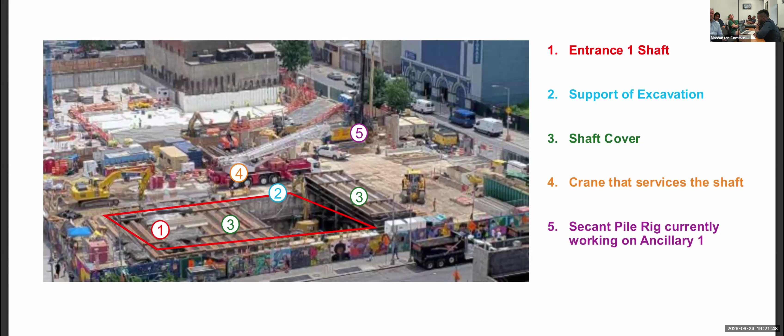On contract one down at the 106th Street station, the work there is currently to relocate the utilities. The two major functions this contract is advancing are the utility relocation, and this is the lessons learned from phase one, because doing the utilities as we sort of got there in phase one created a whole host of complications.

Despite our best practices and coordination with our agency partners, invariably some of the plans we got were outdated - some were 100 years old. They did not accurately reflect the subsurface conditions there, which resulted in a lot of problems and curveballs we had to navigate around, literally and figuratively, extending time and impacting the surrounding community.

So what we did was push all of that utility work up front to get it out of the way. Yes, it's impactful, but it's like ripping the Band-Aid off now so that we're not continually coming back to impact electric one year, water the next, sewer the next. We're doing it all now to get it out of the way so it's done for the foreseeable future, till the end of the project, and we don't have to impact the same community multiple times.

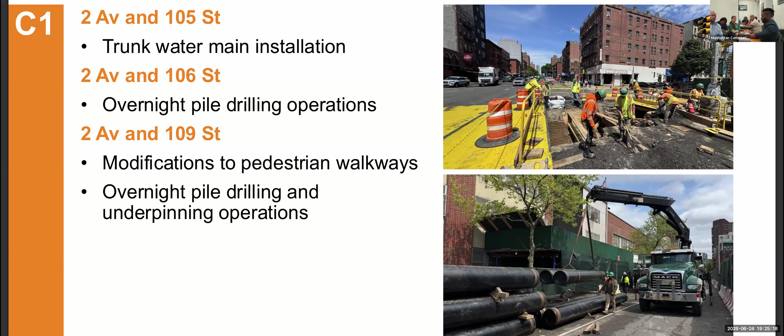There's a modification of pedestrian walkways and overnight drilling and underpinning operations, which is creating that stable environment, but also creating stable buildings to be able to withstand the future work.

Next slide. For contract two, which is a bit north of there, that's for the 116th Street station area. The crux of the work for contract two is the modification, remediation, and retrofitting of the 116th Street tunnels that are presently there now from 110th to 120th. Those were built in the 1970s.

For those of you who might recall a previous iteration of this project, it did run out of money and couldn't finish, and they left us a pretty good starter hole. So what we're going to do is turn those tunnels into the new 116th Street station area, so we aren't going to waste all of that effort and money that went into that.

We're going to turn those running tunnels, because back then they had envisioned a center track that would have been used to pull trains off in the event they needed maintenance or if there was an issue. That center track now will be converted into a future center platform where folks will be able to access either the uptown or downtown bound train. The space for us to implement that is already there.

Along with retrofitting of the 116th Street existing tunnels, they're also going to be doing the tunnel boring operations from 120th Street north to 125th Street, and then west all the way to west of Malcolm X Boulevard.

This is also another lesson learned from phase one, because of the very vibrant commercial corridor that is 125th Street. We had originally envisioned some of that work being done cut and cover, but that's definitely more impactful than doing it with tunnel boring machines.

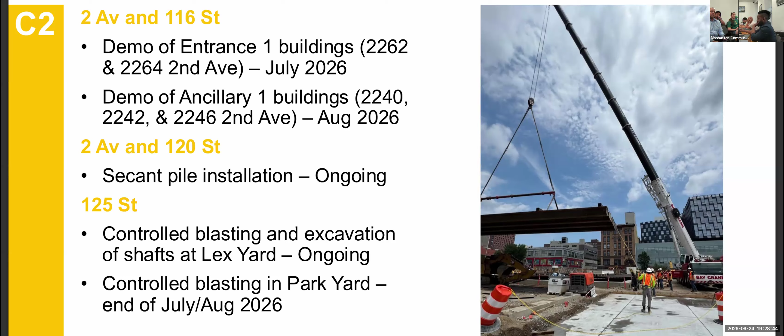Over at contract 3, which is the brand new contract that is going to be mining and creating the tunnels and the station entrances, the structural shell, if you will, they're not going to be putting in any of the actual components or the guts of the station and tunnels. That will be contract 4 after them.

But they have already mobilized on the northeast corner of 106th and 2nd, in the public plaza area that is outside of Franklin Plaza. We acquired a portion of that space outside of Franklin Plaza's buildings, and we have started to mobilize for the contract 3 work, which will eventually excavate for the entrance. It's called entrance 1 for us, at the northeast corner of 106th and 2nd.

They're presently in there doing survey work to confirm. These are design and build contracts, and for those who may not know, the MTA takes the design to about 30%, then puts it out for bid. We lean very heavily on the expertise of these contractors that bid these projects and eventually win them, so that we can lean on their know-how from doing similar projects elsewhere in the country and the world, to do this project better, faster, and cheaper with less impact.

So we bring it to 30%, and then they take our design, confirm our presumptions, and advance that design. That's what they're presently doing at the northeast corner of 106th and 2nd now.

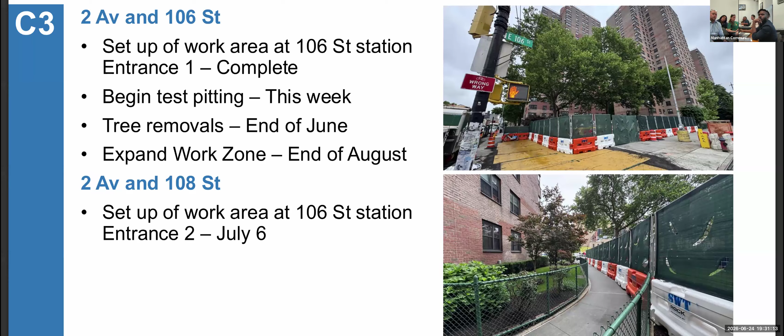So for contract 1, we've been hearing a lot about the business impacts. One thing we have at our disposal is the ability to help with awareness that these businesses are still open, despite the work going on, behind barriers which can often obscure the line of sight to these businesses from the street or the opposite side of the sidewalk, sometimes even the same side of the sidewalk if we have a protected pedestrian walkway outside of the fence line.

So we originally had installed some signage. We had heard from the store owners, from the community board, from our elected partners that signage was not adequate from a size and awareness standpoint. So we went back to the drawing board, and there was a redo of all that signage.

I'd say approximately 90% of that signage is up now throughout the contract 1 and contract 2 areas, because we had to go back and replace what was up of the contract 1 signage, put in new signage, and advance the additional signage. Contract 2 signage rolled out a little more seamlessly, using lessons learned from contract 1, so it was a little quicker and smoother of a process.

So that fence wrap is up. There's also in some areas of contract 1 temporary awnings that have been put up. We've worked with the business owners to design the graphics for those awnings. Because of the machinery needed for the support of excavation and support of their buildings, the machinery is at a height that impacts or would have impacted those awnings. So we temporarily removed those awnings and affixed temporary signage to the building, again to help create awareness.

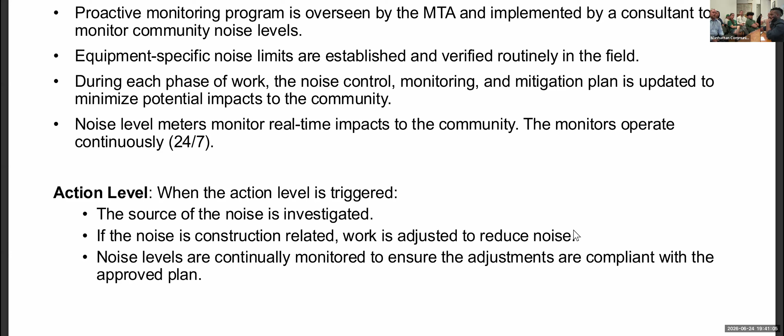We were asked by Uptown Grand Central. We worked with a lot of the stakeholders in this area back in 2022 to do a visioning exercise in and around 125th Street and Park, to understand what the community would like to see from an improvement standpoint, because the mobility hub is there. You have the confluence of Metro North, the subway, and the bus network all there. So there was a report that was done and submitted to the city. A lot of the improvements and findings fell squarely in the court of DOT. So we are in the process of inquiring with the city if we can release that report. More to come on that, whether we can turn that report over, even in draft form, to Uptown Grand, and of course, if you all would like to see a copy of that.

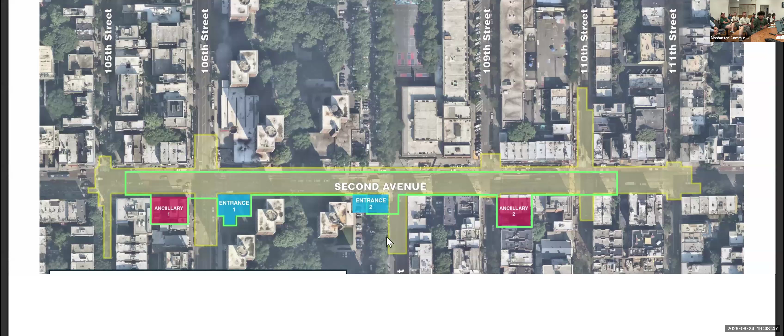Okay, well, now I will ask my question. So I walked by there around school dismissal to see some of the concerns that Dr...

Christie brought this up at the youth and education meeting. You mean 110th or 109th? 109th. I don't think they have anything on 109. We do, right around the corner on both sides. Yeah, they're currently doing building stabilization on the east side, and we walked through it today.

So there are two blind spots on either side when kids are trying to cross the street after school, and they can't really see the cars coming before the cars arrive. So I know, like someone brought up earlier, could the storage be moved to a different area because it's really dangerous to cross? It's a wide road and half that road is cut off.

So a couple things on that. I'm happy to take a look at it. For any of our work zones, we follow DOT guidelines and stipulations. That first 10 feet of the work zone should not have any covering. If there's fence there, it should be open to create a clear line of sight, not only for pedestrians trying to cross there, but for vehicles to see if anybody's going to dart out, because not everybody, vehicles or pedestrians, obeys the traffic signals or the walk lights. So that should be open and visible. Not to say it's foolproof, but if there's a line of sight issue, that's easily correctable and we'll take a look at it.

The other thing is, especially at 109th, there should be pedestrian managers, essentially crossing guards employed by the project to help navigate, especially during school entrance and dismissal. I know during off hours they're not always there, we don't employ them 24/7, but certainly during the high water marks of entrance and dismissal of schools, they should be there to help folks navigate safely across.

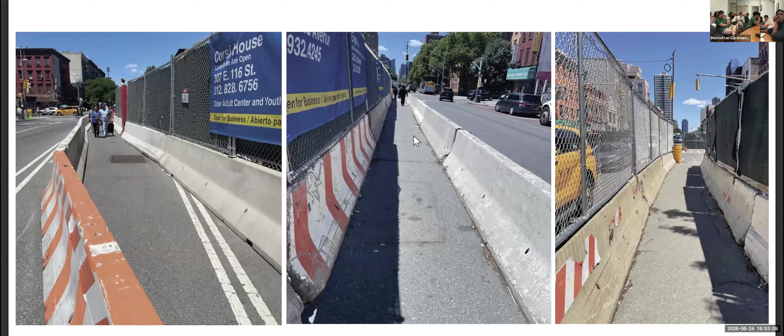Okay, thank you for the presentation, a lot of great information. My question is regarding the blasting time, and I know you said you'll give warnings, but during that time, do you cut off pedestrians from walking during the blasting?

So that was part of what we were monitoring for when we did the test blasting, to understand the impacts. It's been determined that they don't need to stop pedestrians on 125th Street. I'd have to double check whether we're stopping pedestrians on Lexington, right adjacent to the blast. I'll check that for you. But I know we've confirmed there's no impact on 125th, so pedestrians can flow freely there.

Going from east to west? Yeah, I'm just trying to reorient myself, because we go north and south on Second and then east and west where we turn. So they can go east and west. I just need to confirm whether they can go north and south on Lex.

We've also tapped into the city's notification network. So whenever we're going to be doing blasting, they send out a text blast to let everybody subscribed to that network know that they may be entering a blast area. And would you be posting those type of notices on the streets themselves?

Yeah. So the hours of operation for the test blasting right now, or the production blasting, are 7 to 7. We try to stay out of the rush hour periods of transit because of the proximity of the existing Lex line there, and the volume of people coming in and out of the station, so we try to miss the high marks of that.

So again, the production blast for Thursday is scheduled for approximately noon now. There will be notice that goes out again, just letting folks know. Thank you. Oh, thank you so much for allowing me to ask my question.

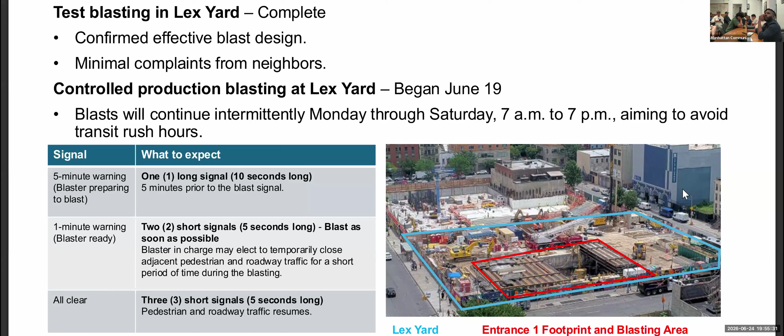And my question has to do with what the honorable councilperson said as it relates to garbage and waste. I'm chair of Health and Human Services, and that's a big issue. She said that in terms of garbage and waste as a result of your folks, but then folks in the community have to go out of their way with their own garbage and things of that nature.

We just had the Department of Health and Mental Hygiene, we just had a Rat Academy training last week, and it was a lost opportunity for folks; so many more of you should have come out for that. So when we talk about waste, we talk about pests and vermin, it's not just that the vermin come up because of the construction, it's because of the waste and garbage and food materials left. So I don't know if you actually gave a good answer to that.

Because it's a big issue in terms of the waste, garbage and sanitation. Are you in collaboration with DSNY? Oh yeah, so I don't think I tackled that. I don't think we provided a response because we weren't necessarily going to address all the questions and comments tonight, we were going to sort of synopsize everything. But I'm happy, as a point of this Q&A period right now, to address it.

So yeah, we work hand in hand with DSNY, and we work hand in hand with the Department of Health and Mental Hygiene. Before we put a shovel in the ground, we walk the entirety of the alignment with them to understand the prolific rat presence already here in East Harlem. One misconception is that the construction created the rats — that's not the case. We may have disturbed their burrow, and now you see them more because they're looking for a new place to live or new food. So there is that component to it for sure.

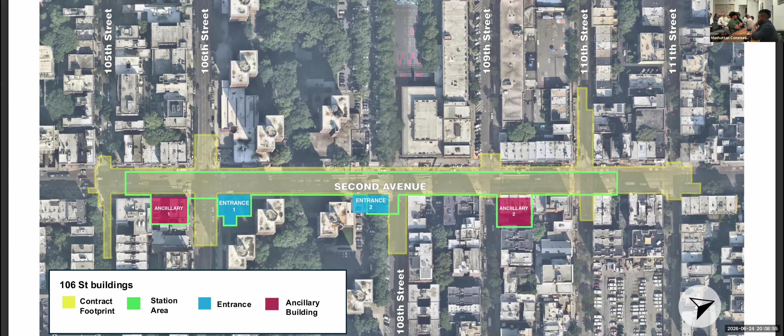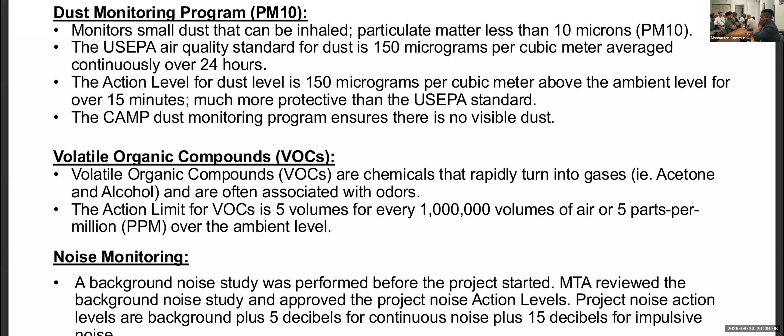With regard to dust monitoring, there is dust monitoring presently going on. There was asbestos monitoring when there was asbestos producing or mitigating activities. So if we were moving any utilities that may have had asbestos insulation around them, that relocation or removal of asbestos material was done in a very strict, confined protocol. That activity is over with for now, until there's another situation. I don't know, Matt, if you know if there's anything coming up. There will be more abatement situations, but there isn't presently, and there have been no elevated readings in that area that I'm aware of.

Again, if there's a situation - we had one, I don't want to put anybody on blast, but there was a resident of Franklin Plaza, Ms. Encarnacion, who had a lot of medical concerns, and she had dust collecting on her windowsill. So our team and DEP went in to test, and there was nothing for our Department of Health and Mental Hygiene - not DEP, apologies, DEP checked the drainage for us. But she was on the other side, above, on the west side. So we're happy to do that.

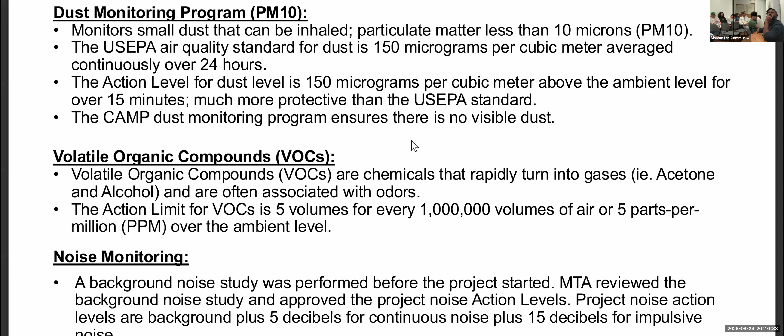Either have the gentleman reach out to us, or, the MTA meets with Franklin Plaza more than they meet with us. So they're definitely going to have their disconnect, and something I brought up to leadership today in the MTA, is there's a disconnect between the board, the chair of the board of Franklin Plaza. It seems like the board isn't getting the information they should be getting.

How you guys address that will be up to you, but you should be aware that there seems to be a significant disconnect. My understanding is Leslie's on that board, I'm on that board, and she's always asking us more questions here. You guys meet every other week, which is significant, while we meet here once a month. So a lot of these questions should be presented to that board, and they should have these answers. You may have to formulate another way, maybe meeting every other week with the entire board, not just the chair, to make sure all the information is being disseminated correctly.

I'll just go through a few things. When Jose and I put this essentially defunct task force back in place, there were a lot of issues, and I've been probably one of the louder people about those issues. But I think we also have to recognize when there are improvements. Jose and I walked through with Matt, Joe, and the team, and I'm not saying there aren't a lot of issues still there, and I think they're aware of them, but there have been improvements made, which means not to stop doing this, but to keep doing this while recognizing the improvements.

I will say that it's helpful when the public comes out, and we're going to do a better job of letting you all know when these meetings are to be heard. Because sometimes when it's just the board saying this, while we are the voice of the public, it may start to sound like we're speaking for nobody. It helps when the public comes out and says it themselves.

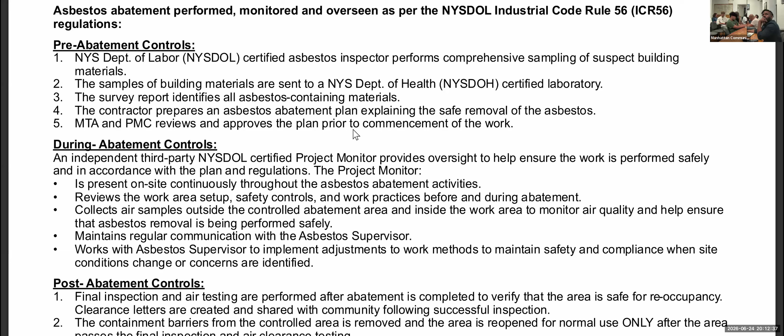And then, just regarding signage, I just had a couple things. Maybe more ADA signage, we talked about that on the walk, and where there are vacant stores, possibly having them put up a for rent sign. I don't know how easy it's going to be to rent anything right now, but that was one of the questions you brought up in our dialogue.

So I can respond to the whole group here, especially if it's helpful to anybody here or online. Typically we work with operating businesses to try to help them create exposure, but we have in the past worked with a developer who has units to rent or a vacant storefront, it's not without precedent. We will put up a sign. We haven't been approached, so we don't know that the person is actively looking for that. So if you do have owners you want to connect us with to do so, I'm more than happy to help them, if they have a food concept or a barbershop or whatever, and have graphics they'd like us to use, so we can help create awareness. Happy to do that.

I've seen some that have their own little sign, so they usually have a number. I have to call myself, but thank you for that.

And then I did send a letter to the MTA and to all our electeds, not just local but citywide, about this idea of an art corridor that I had on 125th by Lexington, all those murals that were originally taken down and put back up. There's the signage for the small businesses, but there's a lot of fencing where there aren't small businesses or there are empty spots, and I think it would help the morale of the community to see something nice, something beautiful where it's fencing right now, even if it's nicely wrapped with green wrapping, and it would activate our local artists. My idea was a dollar for dollar match from the MTA and the local electeds. I wish Porfirio was in the room right now, but maybe they do watch our meetings. The borough president, I think, had $50 million in discretionary funding, dedicated it all to arts and culture, so the entire discretionary funding of the Manhattan Borough President was going to arts and culture this year. So there is an opportunity for some of that $50 million to be poured into some level of beautification in this community.

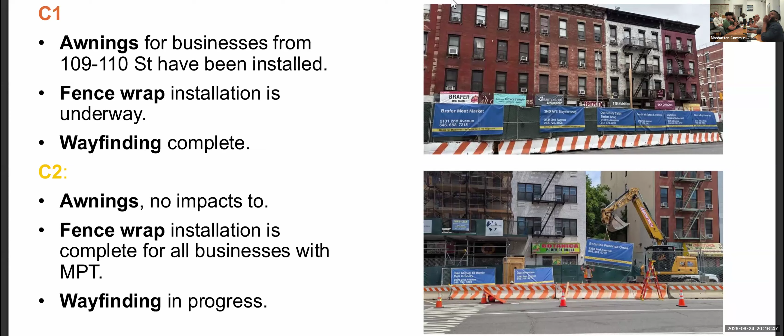Okay, two questions. Which Workforce One are you going to be working with? So there's two Workforce One arms that we're working with now. One is the small business side, to try to help and figure out what we can do on the small business side. But then there is the other one on the workforce development grant side, to talk about creating job opportunities and things of that nature. Is that located on the west side? I don't know, frankly, where they are respectively housed out of, but I can tell you the individuals' names.

Okay, and Adam, you know where I'm heading on this one, right, with the questioning that I'm asking. The apprentice or pre-apprentice programs in East Harlem, are they funded? By who? I'm asking, are they funded? So the pre-apprenticeship programs, there's a host of pre-apprenticeship programs that are part of the Building and Construction Trades Council of Greater New York. Some of those pre-apprenticeship programs are funded, operated, guided by Building and Construction Trades. There are a couple, and no coincidence, they are two of the ones that are in East Harlem. One is New Non-Traditional Employment for Women, and the other one is Pathways to Apprenticeship for formerly criminally justice involved.

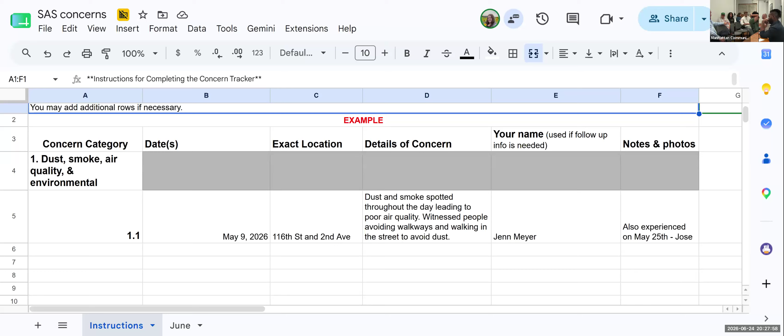I actually have a question, I might have missed this, I just came in about 30 minutes ago. Did y'all talk about the exercise of eminent domain for some businesses along Second Ave? What is the plan for the residential units? We're fairly confident that all of the property, both residential and commercial, that we need to advance this project has already been acquired. What we're in the process of doing now is working through the relocation. We have a dedicated relocation consultant who works with residents to identify similar accommodations in terms of size and monthly rent, and we'll present those options to you. We will also pay for all of your moving expenses to move into that new location.

We'll assist with the move—I won't personally, but we'll have a mover assist with the move. Similarly for businesses, there's a similar plan, but it also takes into consideration fixtures. So there's an appraisal of fixtures, like if you're a food service business with commercial ovens and things like that. The last bit, because I know it sounded like you had a follow-up, especially on the residential side: if there's a delta—say we can't find a similar accommodation to your $700 a month rent-stabilized apartment, and we can only find you one for $1,000—we'll pay the differential of that rent for the new space, depending on your age and income level, possibly for perpetuity.